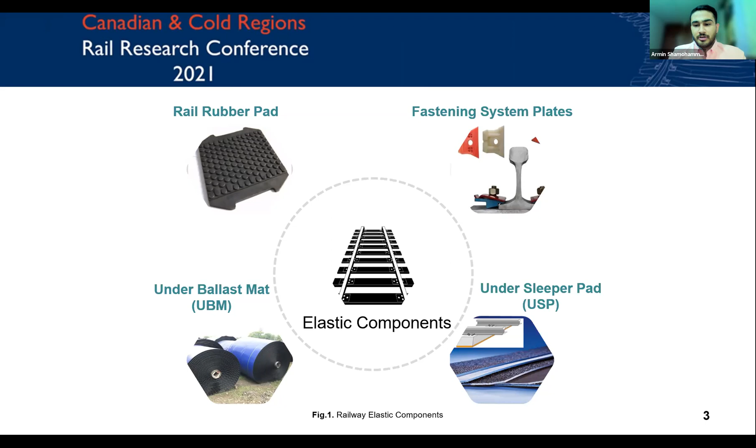Thomas and Gupta estimated that the rate of tire production will have risen and passed 5 billion by 2030 worldwide. Therefore, researchers like Sanchez et al. commenced conducting tests to analyze the feasibility of ELT use as DTUSP and showed that 5 to 11 millimeter thick DTUSPs seem to have the best performance and meet optimum stiffness.

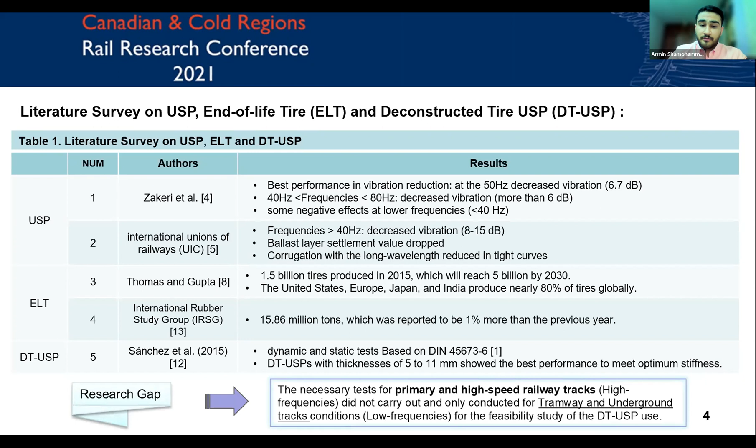However, the gap we decided to fill and investigate more in depth was the necessary tests for primary and high-speed rail tracks, which were not carried out; the feasibility study was only conducted for tramway and underground track conditions.

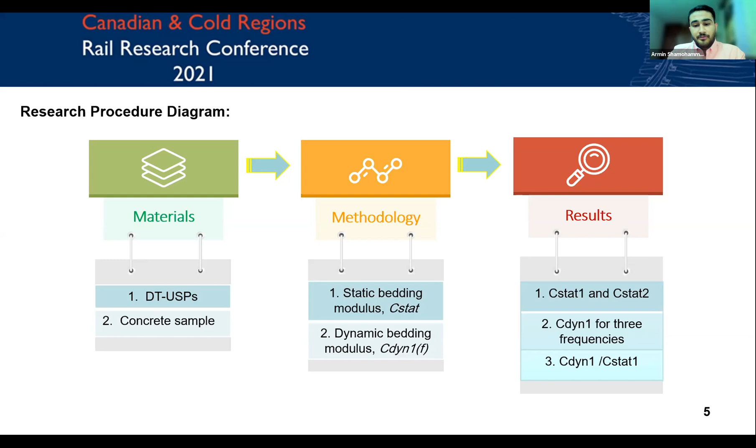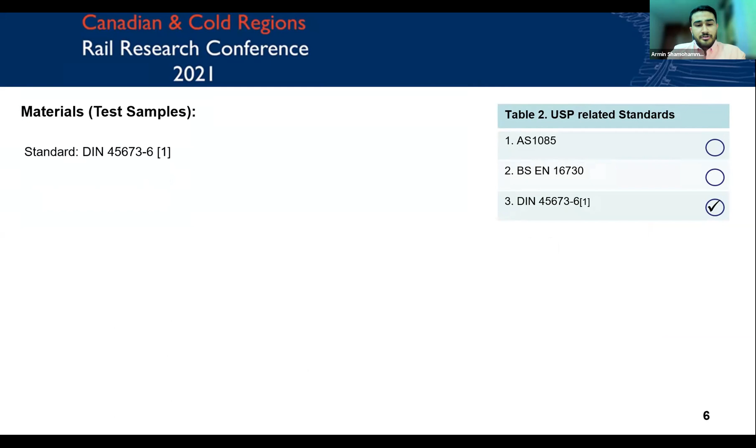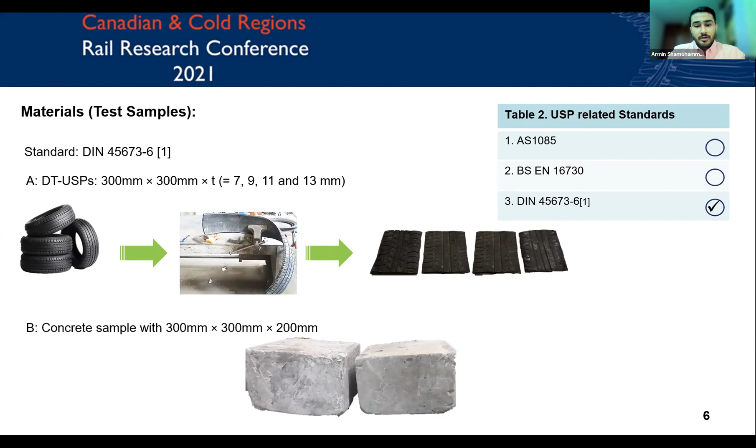By evaluating different USP associated standards, we chose to go with the DIN standard for validation and compared with other research. According to the DIN standard, as we can see here, the DTUSPs with the given area dimensions and different thicknesses of 7, 9, 11, and 13 millimeters, and a concrete sample with the same area as the pads and a height of 200 millimeters were subsequently utilized for the tests.

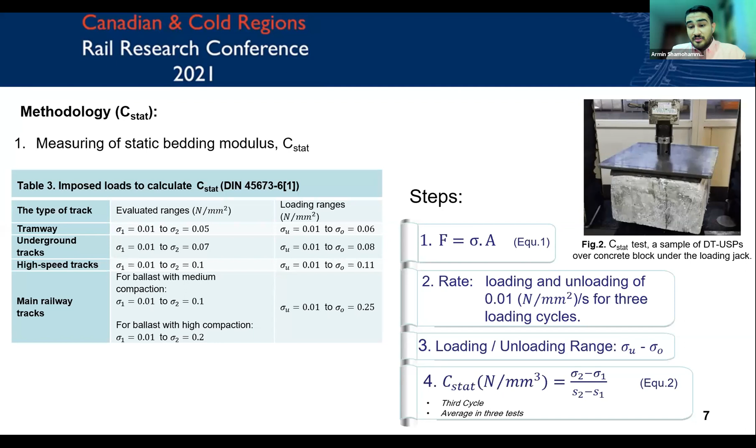Turning to methodology, the first test was the static bedding modulus, or C static. Table 3 demonstrates the required imposed loads to calculate it for 4 types of tracks. There are 4 steps to measure C static. To begin with, the force is calculated for any range of loading, with a loading range of sigma U to sigma O and a rate of 0.01 newtons per square millimeter per second. The stresses and settlements were recorded at the third loading cycle, and C static is calculated for stresses ranging from sigma 1 to sigma 2.

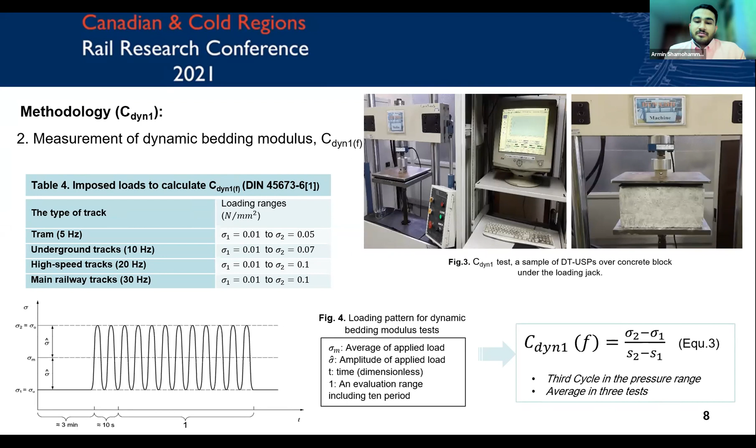The second test was the dynamic bedding modulus. The imposed loads to calculate C dynamic are given in table 4. For measuring C dynamic 1, at each test frequency, after a 3-minute rest time at sigma 1, the data was recorded after 10 seconds of applying dynamic load. 10 complete cycles were performed for each frequency. Finally, for each frequency, C dynamic 1 was calculated according to equation 3 in the third cycle. The average results of 3 tests were recorded for both C static and C dynamic.

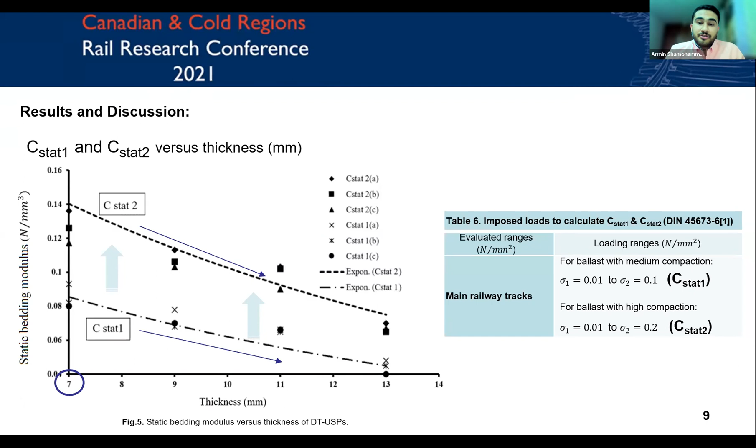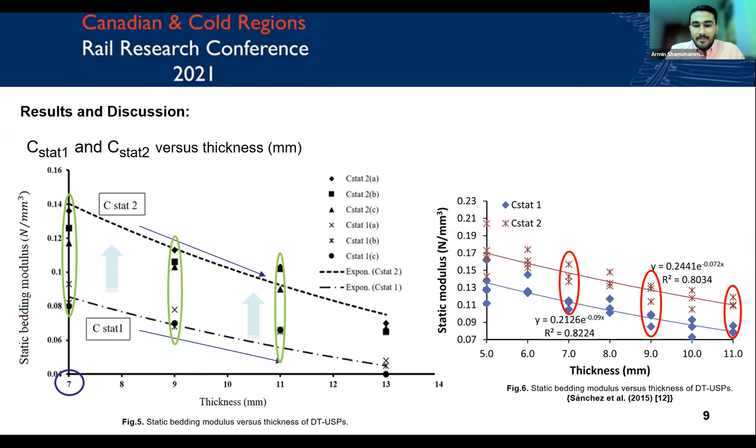As expected, by increasing loading range due to the higher compactions of ballast according to the DIN standard, from medium to high ballast compaction mode, higher C static values were obtained. On the other hand, the thinner these pads, the higher the elasticity modulus we calculated. According to DIN standard and obtained results for medium ballast compaction, all thicknesses, and for high ballast compaction, the DT-USPs with a thickness of 7 mm are classified as soft pads, and they will be suitable for decreasing vibration and stresses induced by train. Compared with Sanchez et al. research results of the same parameter, trends and figures for the same thicknesses matched and are comparable.

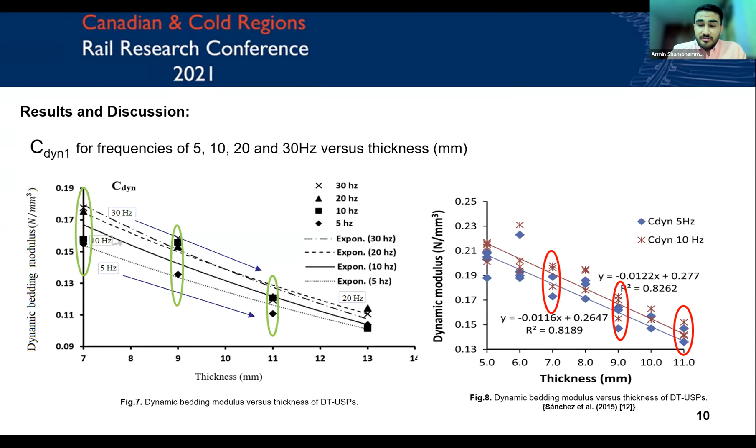Moving on to the C dynamic 1 for frequencies of 5, 10, 20, and 30 Hertz versus thickness, the results are demonstrated in this figure. The graph reveals that C dynamic 1 moderately falls by increasing pad thickness, and the higher the frequencies, the more C dynamic values attained. Although the noticeable point is for pads with higher thicknesses of 13 millimeter, the values of C dynamic for frequencies of 20 Hertz surpassed that of 30 Hertz. That could be extended in further investigation. Compared to results of Sanchez et al. study again, trends and figures for the same thicknesses are similar and follow the same rate.

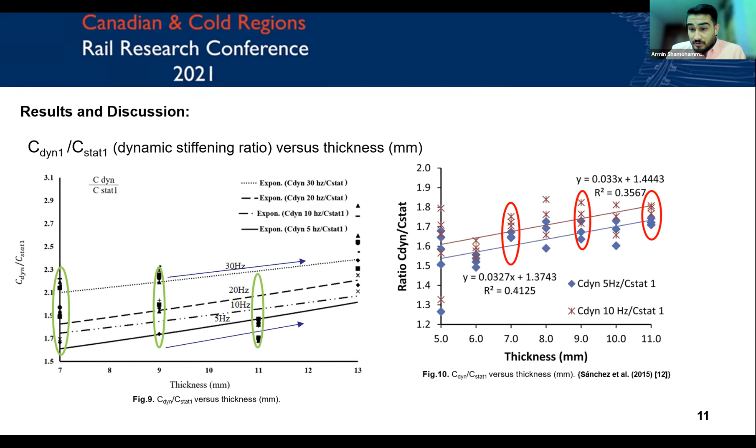And the last parameter, the dynamic stiffening ratio, the ratio of C dynamic 1 and C static 1, has an upward trend contrary to two prior parameters. It is apparent that by increasing thicknesses and frequencies, the dynamic stiffening ratio rises at almost the same rate. And moreover, it follows the results of the Sanchez et al. book for this parameter, as depicted in figure 10.

And here are my conclusion remarks. First, the thickness effect significantly impacts the pad's static or dynamic performances, which is evident by evaluating the pad's stiffness moduli charts. Thicker pads tend to demonstrate higher flexibility, while the thinner pads have higher elasticity modulus. Subsequently, the second finding is that according to DT-USP's static test results, for medium ballast pressure, pads with 7 to 13 millimeter range of thicknesses, and for high ballast pressure and compaction, the 7 millimeter thick pad seem to have the capability to decrease vibration and stress induced by a train. Finally, the examined pads are highly likely to be suitable for main railway tracks.

And in the end, I ought to mention here what remains to be known is whether these end-of-life tire USPs will have a negative impact, such as reducing lateral resistance of rail tracks, alongside the benefits they bring. And if this topic interests you, I highly encourage that line of inquiry as we continue to address this important issue in further investigations with different study aspects like numerical analysis, like discrete element methods, and site tests in various conditions, including implementation of these pads in cold regions, or even other types of tire-derived resilient components, such as tire-derived aggregates and recycled rubber mats.

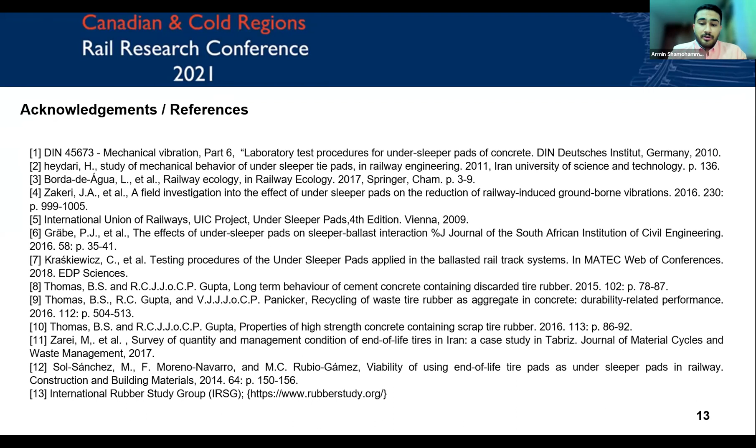I just have a quick question about the lateral resistance and also the damping for the vibration, because when we use under sleeper pads, especially when we have some freight track or also high-speed track, there would be some concern regarding the lateral resistance and also lateral forces. Do you take this into your consideration or not? And also, what about the damping vibration?

Because when we use something like rubbers, the tires that you said, there would be a problem with the damping. For example, when we use them on the bridge or some stiffer parts, there would be some concern to transfer the vibration directly from the ballast to the substructure. So do you actually work on these matters or not? And many thanks for your great presentation again.

You're welcome. Thank you for your great question. Actually, I've done some research on the damping ratios of these kinds of pads in another study that you can find in my Scholar or LinkedIn. I worked on ballast boxes with the ballast and implemented these USPs on the top of that. And we calculated the damping ratio, the ballast breakage indexes, and the other indexes that will be useful for further investigation.